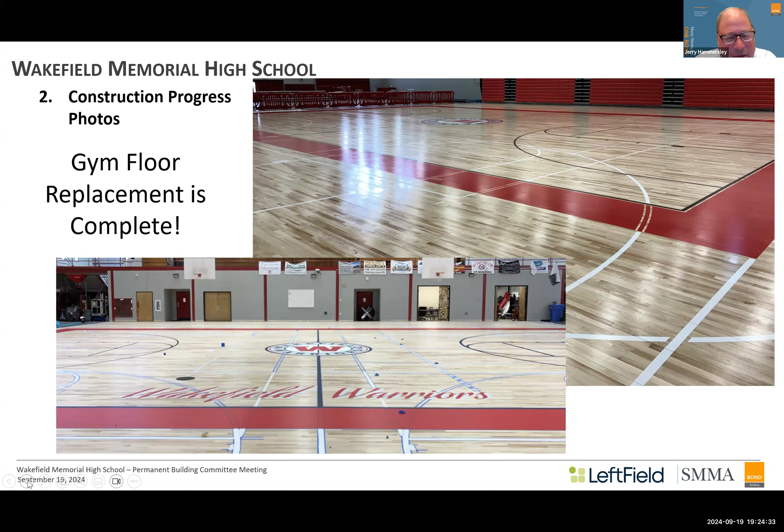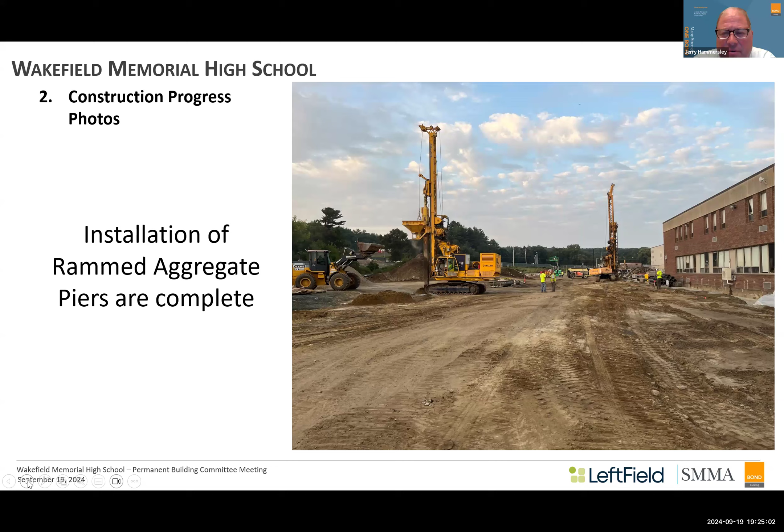If you want to flip to the next one there. This is down in D building, where after the existing culvert had been removed, Keller did get them back to do the remaining scope of their work. They're now completed. All the rammed aggregate piers for phase 1 have been completed, including the ones that support the retaining wall on the east side. So everything throughout the building and the retaining wall is completed, as well as in area 4.

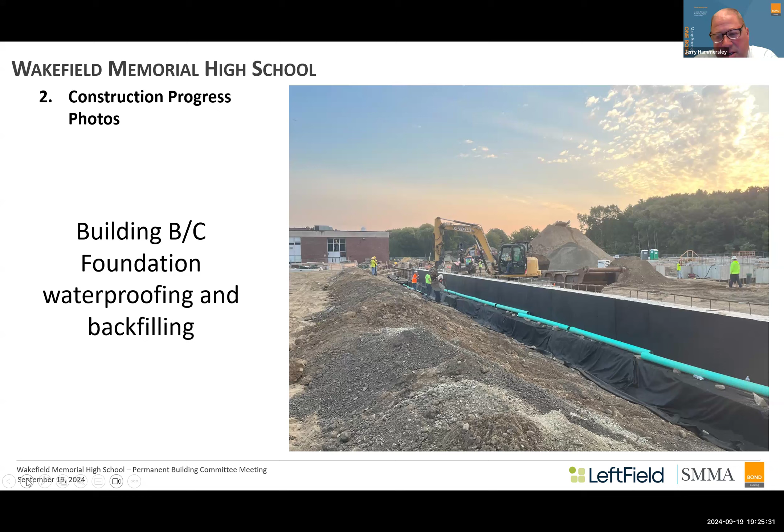This one is taken looking north from the Hemlock side. We've completed a lot of the B building foundations, probably about 65% completed at that point. A lot of the foundation drain going in, but this has all since been 100% backfilled so that we can actually start using the new access road and close the original gate from the Hemlock side.

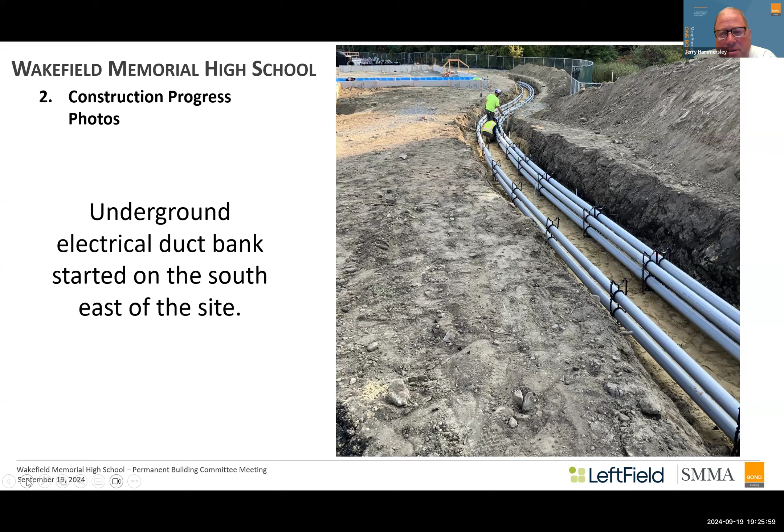Flipping over to the next, this is the duct bank construction on the east side of the site. Continuing what we did get done on Hemlock Road, this is now going south to north across the site. We've got all the manholes within the site done, so the next stop for those pipes is basically to hit the transformer pad at the north end of the site. So we've just been working with Gas and Light to get inspections on that and get that completed.

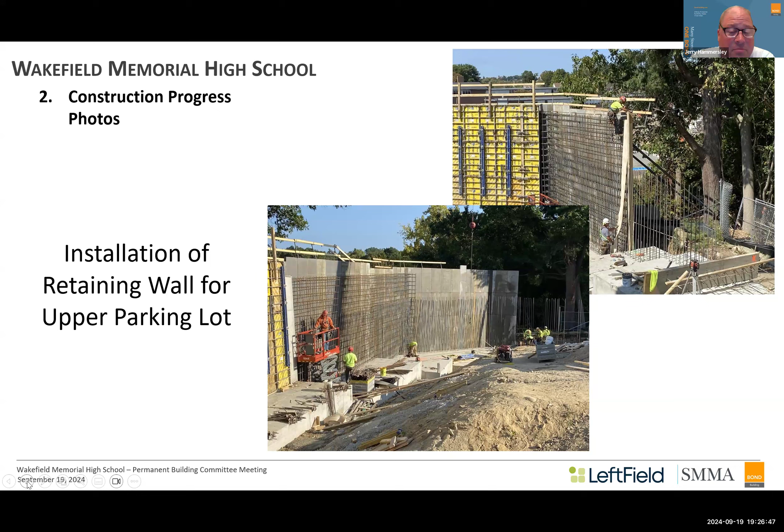Flipping into this one, this is the upper lot retaining wall construction. The lower photo shows the major center pour, which was 130 yards that we completed yesterday. There was a little bit of a setback - we had some ledge on the north side of this, in the upper photo, bottom right-hand corner. We did get the ledge removed, but then ran into some extended organics that had to be removed, so we put some lean concrete for support to replace that. That has since been backfilled as of today, and we're starting to move forward on the footing construction for the north side tomorrow. Hopefully we have about a week and a half left up there for the wall, and then we can forge ahead with the remaining construction of that lot.

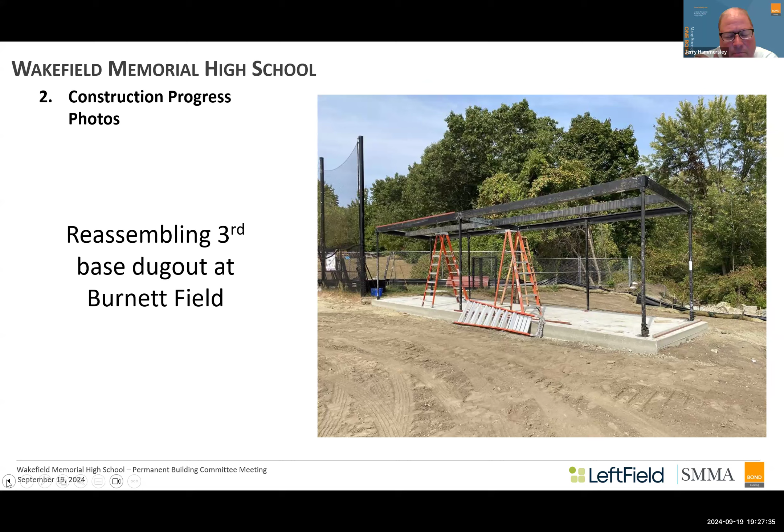For the softball field, the dugout reconstruction is 100% complete now. We're going to bring the painter in next week to repaint it, since it was laying in the grass for a little bit, so we'll get that cleaned up. Quigley has since started the sub layers in the field. We've got a lot of the stone out in the outfield completed. Did start today on laying out the Mirafi in the infield, starting the first of 3 layers there as well. So probably early to middle of next week, that's 100% ready for Emmanuel to get started on placing the finished layers and starting the irrigation as well as the fencing.

But just to hit some of the highlights on the rest of it, like I said, real quickly, the upper lot, Gary.

Real quick, one quick question - have we seen a plan for the irrigation? Yes. Can somebody circulate that at some point, or where is it?

It's a formal submittal, but we could certainly share it with you if you need to.

That would be great. It's basically a main that goes down the first baseline that feeds some heads in the infield, and everything is zoned through the outfield from the first base side. We have the new service that's going to be inside of a fenced enclosure, and the time clock will actually be inside of that fenced enclosure as well.

Yeah, what I'm concerned about is I just want to make sure that there's the proper zoning so that the infield can get watered or sprinkled during a game solely, and that it's zoned that way. That's my concern. We can definitely share it with you. I just want to make sure that's the case. Okay.

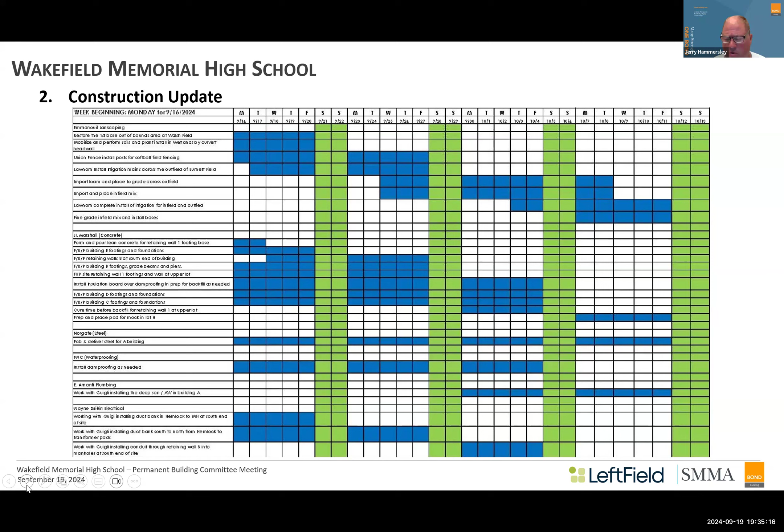Amanti we have now on site - they're a new player as of last week. We're going to get them going on some of the underground acid waste and sanitary in Building A before the steel starts as well, solely because that stuff is a bit deeper than the rest, and we want to use larger machines to get it done before the steel goes up.

But that's about it. Is there any questions or comments regarding the presentation by Jerry?

Jerry, does Quigley dig for the undergrounds? Yes. Do they coordinate with the MEPs? Yes. Thank you. Any other questions or comments?

Thank you, Jerry. So just to talk about a few upcoming dates, we have the PBC construction tour on October 3rd at 5 o'clock, I believe. And the neighborhood meeting on October 10th. Then our next permanent building committee meeting will be on October 17th.

And for the neighborhood meeting, we're going to be able to use the theater there, as far as we know. I still have to confirm with Tim O'Brien - we're either there or we're in the cafeteria. Just let them know.

I don't know if we want to talk about the town day. I'll go very quickly - Tom Galvin has volunteered to be there all day, and Wayne has volunteered to be there between 1 and 2:30. We appreciate greatly you two doing that.